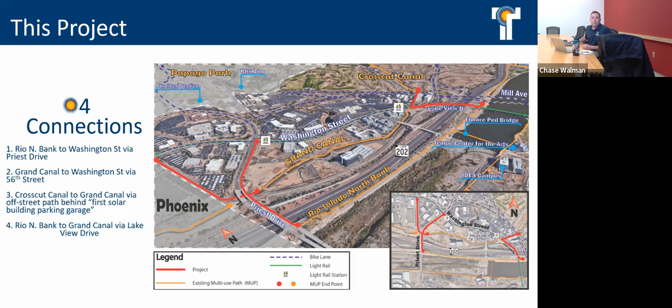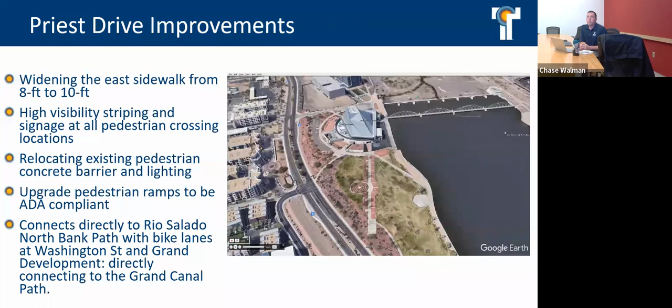I'm going to go through each one of these four and show you these preliminary design concepts. This first video on the right will take you from the area of Tempe Center for the Arts and our Elmore pedestrian bridge, along the existing Rio Salado North Bank path towards Priest Drive.

What we're proposing here is to use the east sidewalk. We're going to improve it and replace it to make a 10-foot wide concrete path that could be used for multimodal travel on the east side. In addition, we'll be looking at upgrading all of the ramps so that they're ADA compliant.

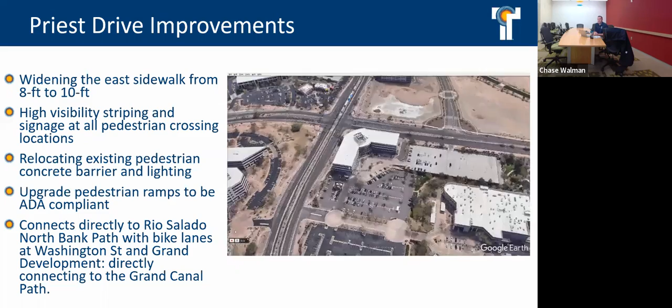This will continue from the Rio Salado North Bank path along the east side of Priest Drive. You'll have this 10-foot pathway to connect to the Grand Development's entrance, which connects directly to the Grand Canal, as well as the existing bike lanes along Washington Street and Priest Drive. This will show up here in red.

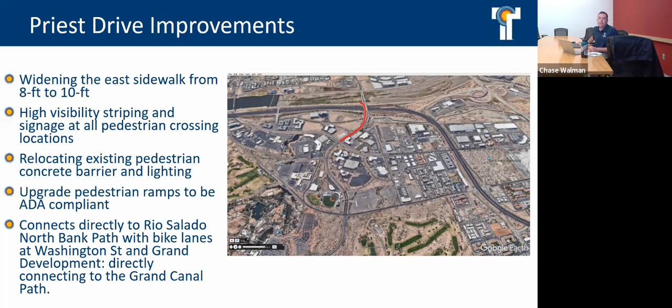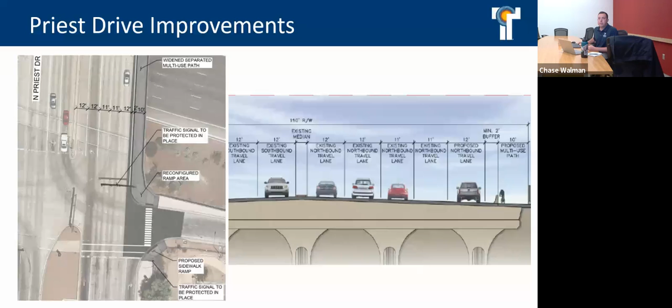And this is the proposed improvement. Again, widening that east side sidewalk to make it 10 feet, and then narrowing some of the existing travel lanes. We're also calling out high visibility crosswalks and new directional ramps.

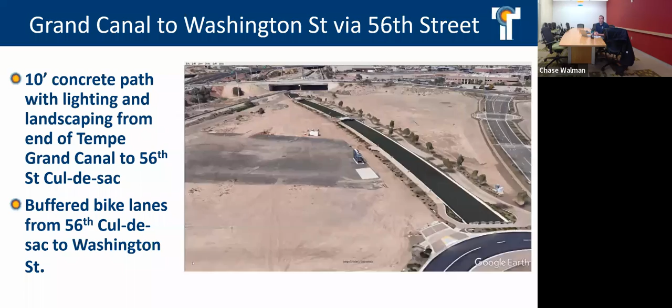Ahead, you can see the Priest Drive Bridge overhead. This Grand Canal path, the existing one, is underneath that, so we will remain at that same grade. Right now we are getting towards the end of the existing Grand Canal path towards this third bridge. What we're proposing here is to continue that path underneath the Priest Drive Bridge until we get to this 56th Street alignment.

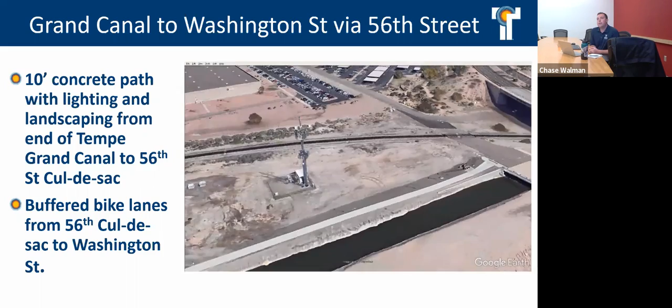This is the existing condition that will remain today, which is this asphalt maintenance road separating the Phoenix Grand Canal from Tempe's Grand Canal. We'll then continue our off-street pathway north along this 56th Street alignment until we get to this cul-de-sac area, where the improvements will transition from off-street pathway onto on-street improvements.

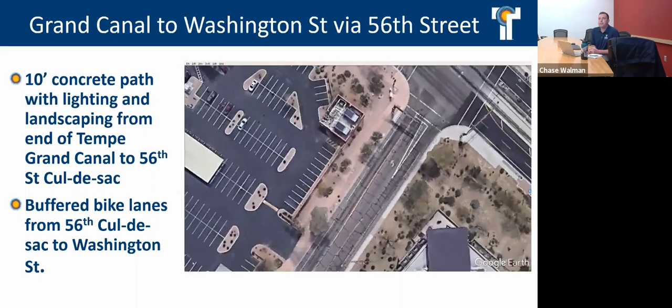What we're proposing here is a pavement rehabilitation project and new striping to accommodate buffered bike lanes along 56th Street. These will connect to the bike lanes you see here along 56th Street, as well as along Washington Street. Sorry, hopefully I'm not making people too dizzy here—it was a little hard to drive on Google Earth—but you'll see this alignment again show up in red.

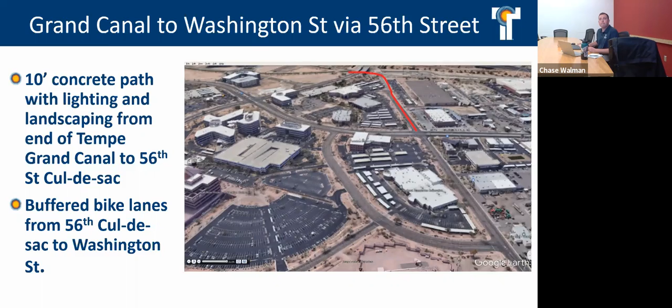This is a conceptual illustration of what I was just walking through. On the east end, you have the existing Grand Canal path we would connect over here. This in gray is our proposed alignment, which was what we designed back in 2018 for the Grand Canal Phase 1 project.

We would continue that project along the west side of this future proposed roadway that would be built by the nearby development. What we would propose here is an off-street pathway with lighting and landscaping. That's not shown in this conceptual illustration right now, but it's something that we'll bring back in our next public meeting once we're further along in the design.

And then we'll transition from that off-street pathway over to our on-street location, where we're proposing buffered bike lanes the rest of the way to connect to the existing bike lanes at 56th Street and Washington Street.

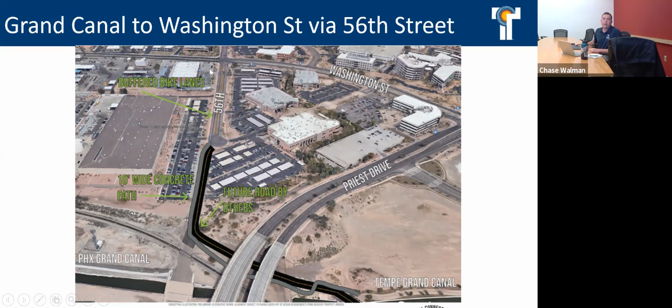This is the proposed cross section of that on-street section. What we're proposing here is 6.5-foot bike lanes and a 2-foot buffer separating the bike lane from the vehicular lanes.

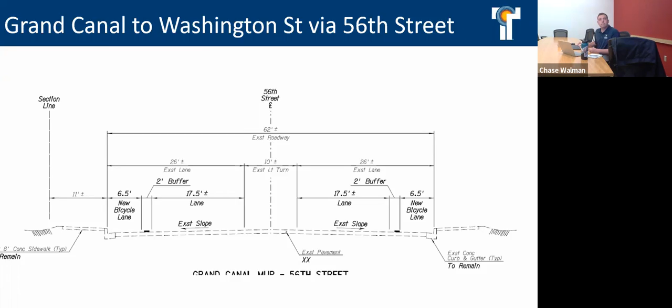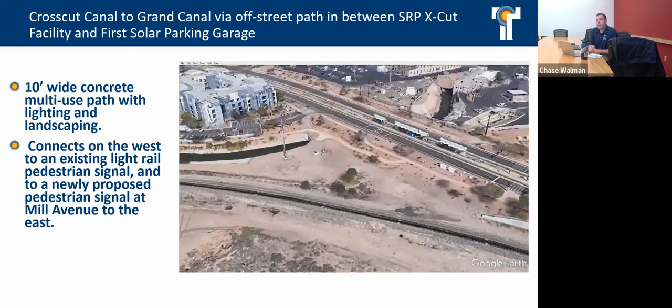Next will be this crosscut canal to the Grand Canal segment. This is a very small but important connection and gap in our system. We're zooming in on the east end of Tempe's Grand Canal at the existing pedestrian signal near the light rail. This is our proposed connection to Tempe's Grand Canal.

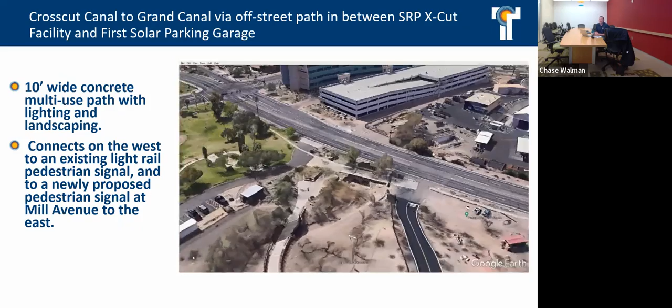We're proposing to go through this existing signal and then between the First Solar parking garage and the SRP crosscut facility, where we meet up with Mill Avenue. There we're proposing a new pedestrian signal at Mill Avenue to directly connect users on this side, the existing crosscut canal section. What we're proposing here is a 10-foot wide off-street pathway with lighting and landscaping, and then that new pedestrian signal.

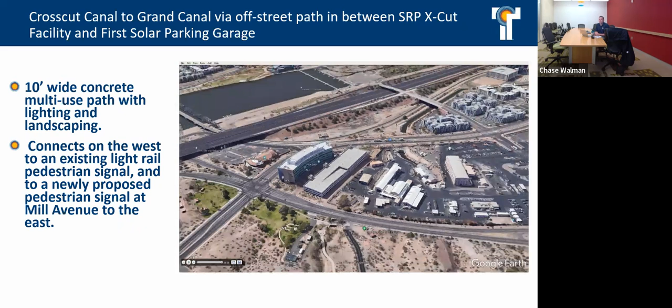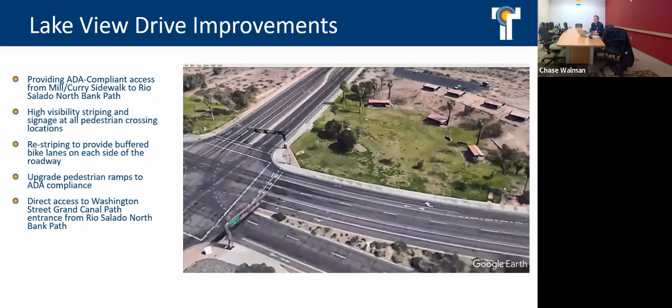Where feasible, on the west is that entrance again to the Tempe Grand Canal and the pedestrian signal that exists today for the light rail that I talked about. Over here, this is something that came up with our public outreach in 2019 or 2018, talking about the lack of accessible route connections from the Mill Avenue sidewalk down to the Tempe Town Lake area.

As part of this project, we'll also be completing the gap in accessibility, providing an ADA accessible route from the existing Mill Avenue sidewalks near Marquee Theatre down to the north side of Tempe Town Lake, the Rio Salado North Bank area. All these areas in red are the proposed improvements.

That horseshoe shape again shows the on-street improvements where we'll be proposing a new high visibility crosswalk, directional ramps, and buffered bike lanes. This is a segment of missing sidewalk currently that we're proposing to complete. This will take you over to a new accessible route making its way down to the Town Lake Rio Salado North Bank area, and we'll keep the existing staircase there today as another secondary connection.

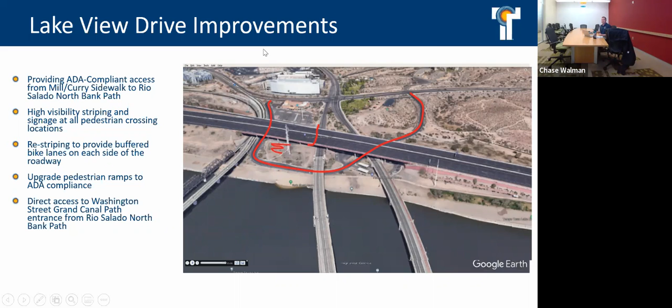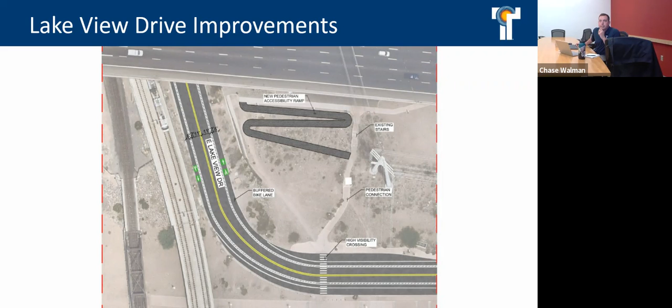These are some plan views showing the existing condition and the potential proposed buffered bike lanes and the accessible route. You can see the existing staircase that will remain. Here is a rendering of that same area.

And we have another rendering here. This is as we're making our way north along Lakeview Drive. And so those are our 4 segments.

So going into next steps, we went to get initial feedback from our Transportation Commission. We have this meeting right now, and then another evening meeting today showing the same materials. Once we get all that feedback, we'll develop our 15% level designs. Those are the designs we'll take back in the spring for another round of public meetings to get public feedback. But ultimately, we're proposing to finish up the final plan specification estimates, so the project is ready to bid for construction in the later part of 2023. With that schedule, we'd anticipate construction starting in the summer of 2024.

And with that, I wanted to thank you again for taking the time in your lunch hour to review the Grand Canal Connection project. We'll have all of these materials and additional materials available on the website at tempe.gov/Grand Canal. That way you'll be able to zoom into these designs a little bit closer. And through that webpage, and also at tempe.gov/forum, we'll have the survey available so we could get your recorded feedback.

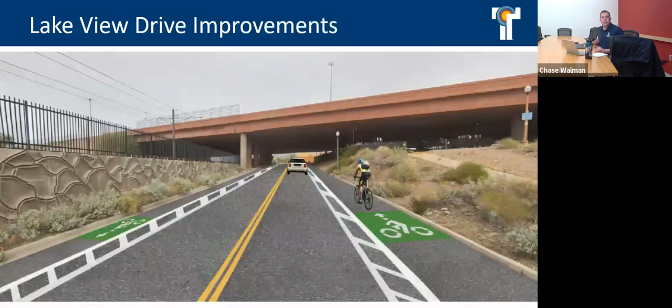We have another question. What is the crossing on Mill? Maybe I'll go back to that one. Hopefully we can see it better. So this proposed crossing is basically at the entrance of where Crosscut, I know it's a little cut off here, it's at the entrance of where Crosscut Canal path entrance is. So there's a nearby driveway just to the south, and then just to the east, just off this image, there is the entrance to the Crosscut Canal path. So what we're proposing is to make the most direct connection possible to the existing Crosscut Canal path entrance. Again, we're really preliminary, so we still need to talk to the adjacent property owners. This alignment might change, but this is our preliminary proposal for where that connection would be made. So it'll be a new pedestrian signal.

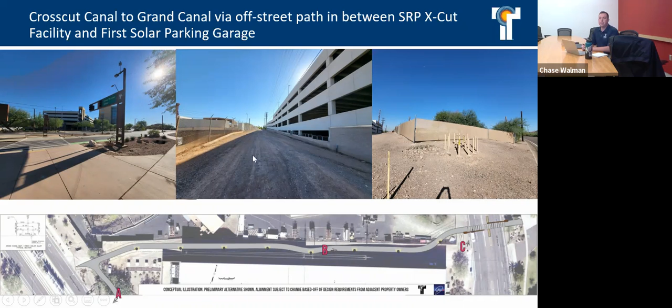Okay, I think that clarifies. There was the question about a signal. Yeah, so on the west end, this image right here is the existing pedestrian signal for the light rail station. So we're proposing to use that on the west side, and then on the east side, we would be proposing a new pedestrian signal at Mill Avenue. Great, hope that answers your question.